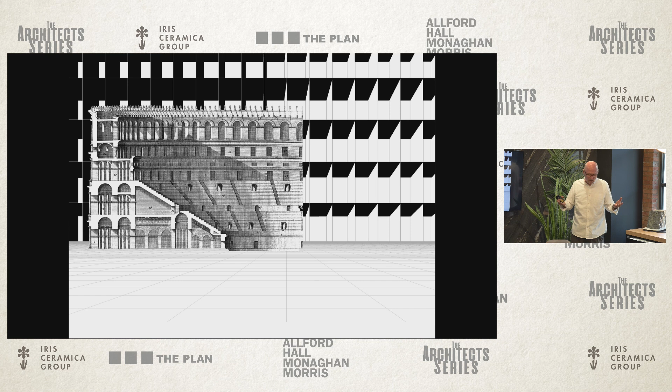This is a drawing we produced that's become a reference idea underpinning our interest in the theatre of everyday life—this idea of longevity. A structural engineer friend said recently, 'it's our time, the frame is the big problem, it's the big carbon problem, so we're responsible for it as engineers.' I like to think as architects we're responsible for it too, because we're not interested in the frame or the services or the architecture alone—we're interested in the whole thing.

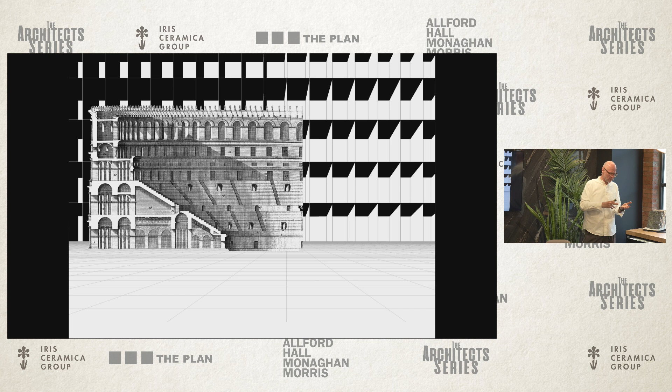But the frame is the first thing that goes up. It's the last thing to come down. If you get that wrong, you might as well forget architecture. So that's kind of the long-term project of the building: generosity.

In the 60s, when we squeezed buildings down, we created a legacy problem. The more generous historical buildings, the warehouses of the 19th century around here, work because they've got volume. It goes back to long life, loose fit, low energy. We talked then about that's the theatre, this is the stage set.

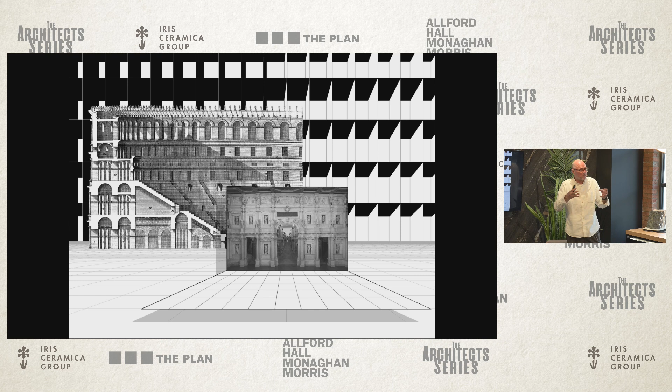Parts of the building will have a longevity of 5, 10, 15, 20 years. They are the more permanent architecture. When we worked on the Barbican for 20 years, we were building architectural objects within the bigger project of the Barbican. And then there's the props.

These are the furniture of everyday life. This is the clothes of the building. This is the things that allow people to make the building theirs, to take it on and do things.

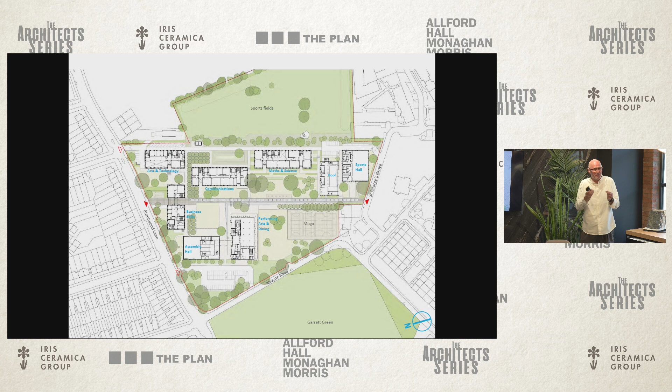And then there's that idea of working with a space at a very pragmatic, low-level brief, and then creating a series of buildings over time in an opportunistic way with an idea, but it shows architecture can happen in more than one way. The idea here was to recognize the constraint and turn it into the opportunity, this idea of slip form, layers of space, and obviously a nod to Breuer, but a pragmatic and clever way of making a system that was adaptable and could be rotated so you could create architectural variety.

But these are essentially just simple vessels, and the windows are moved as a play within that to distinguish the external form from the internal spaces. And then, of course, the bigger idea, which is the community of school children who use that space and come together.

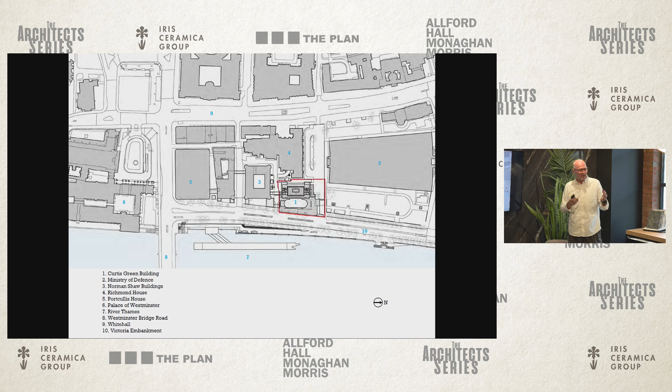This is Scotland Yard, a complex historical site. Paul talked about the curved glass vessel as a welcoming piece. He didn't mention the fact that there also has to be a bomb-proof welcoming piece. So again, in the most simple design, an extraordinary technological challenge of glass that's 2 inches, 50 millimeters thick.

And then this idea of, there's a lot of noise made now by some architectural magazines that are less notable than the plan about retrofit as the future. Retrofit has never been anything new; the architecture is the long history of retrofit.

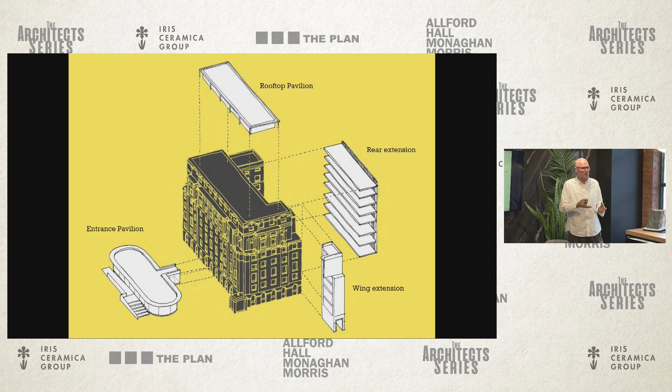Most buildings you will find are built on the footings of another building. Facades have been removed and reworked. Room linings have been removed and reworked. And this is what we were doing for the first 20 years of our life.

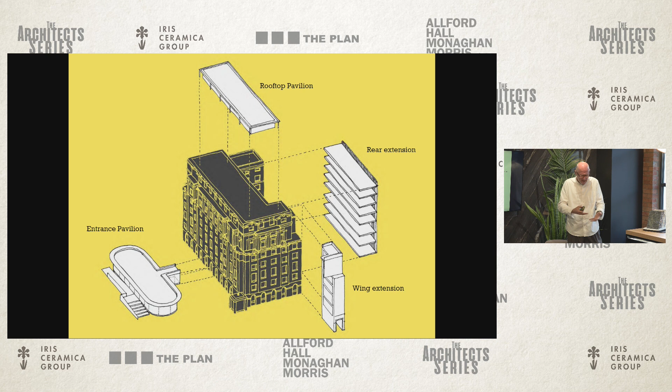We were desperately keen to do something new. And in the end, we realized it's all architecture. Finding something and then working with it is no different than finding a piece of city. We don't clear the whole city so we can do our own thing.

And then this, I think, is a rather beautiful drawing I found in the archives of the idea of the reworked, restructured building, and this early idea of the theatre of life behind, and the symbolic importance of architecture, its relationship to government, its relationship formally to historical buildings within its own site and beyond, and how a particular motif used by Norman Shaw can then be played out from a layering of stone and brick into a layer of stones on the ground plane, a kind of reference across time and across planes.

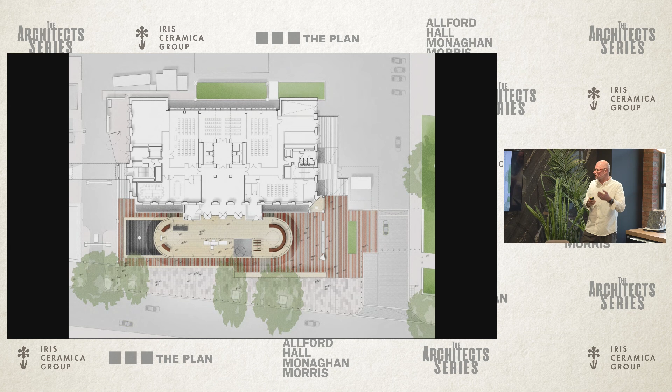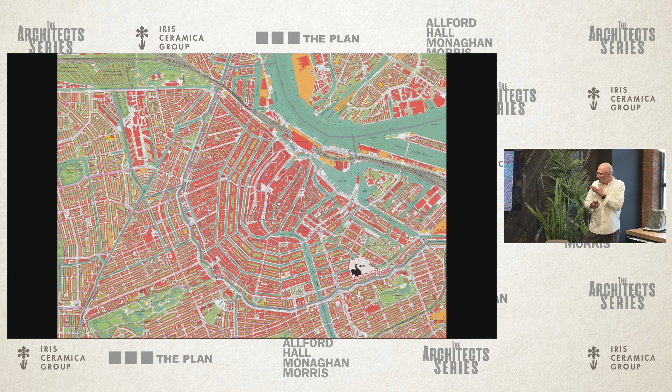And then this idea of talking about the churches and the plan of Rome, the Nolli plan, but actually the eternal frame and the idea that this building has a meaning to people. Amsterdam, a foreign city, being part of a historical fabric, being part of Gawronski's vision for the building, engaging with him in a discussion - our early diagrams being rather cruder than the piece, but that's the nature of architecture at the early stage, and I think that's okay.

The idea of their brief - it's 1 million square foot, but their brief was pretty simple, and we won the competition by saying to them: look, we know that whatever you tell us the brief is, it's not going to be that in the end.

We're making a journey through a building, but we're going to organise that journey - the streets and a series of public rooms within the building - and the rest of it, we'll just pour the uses in as your needs change over time.

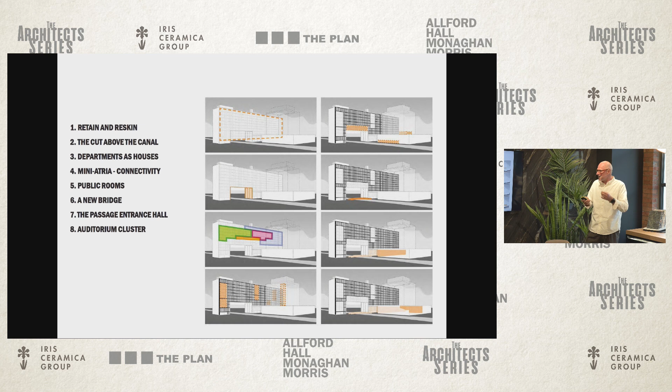And we invited 6 other European practices to work on little elements within the project. And then this idea of different scales of social engagement in specific venues within the building, but the biggest social engagement of the whole thing is what they call the study landscapes, which is the promenade from the Bradbury building.

And then the bigger promenade - this is the interim use. So for 5 years you entered the building from an island that we built over the canal because we hadn't done phase 2. We created these journeys within the building, with this idea of vistas, colours and form.

And then these are the props within it, some by us, some by others. I don't like particular items within this, but does that matter? They're items of furniture that will come and go. It's nice to control them, but 20 years on, it'll change again.

But the bigger picture is the building and the city and its legibility, with the public rooms identified as a piano nobile - so you're aware that they exist and that you could access them. That idea of architecture as a journey across time, not one architect, not one practice, not one individual. And then this idea of making and remaking, retaining - it seems to be an ongoing theme.

And then this idea of an intermediate space that's used as an entrance in the first condition - the 60s idea that Craig mentioned in the film, where there is no entrance because everyone's going to arrive by car. And then us making an entrance in the void, and that entrance becoming the public room that connects the students who travel through it into the lecture halls that are like boats they walk on and then drop into.

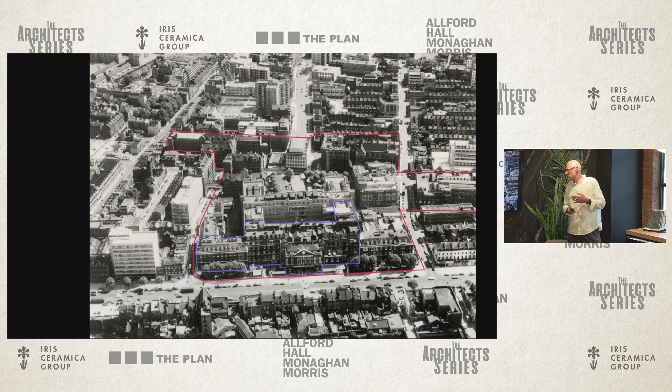He actually had a very serious illness and health scare here, and he was very interested in seeing the project on the basis that it actually both shaped his life and saved his life.

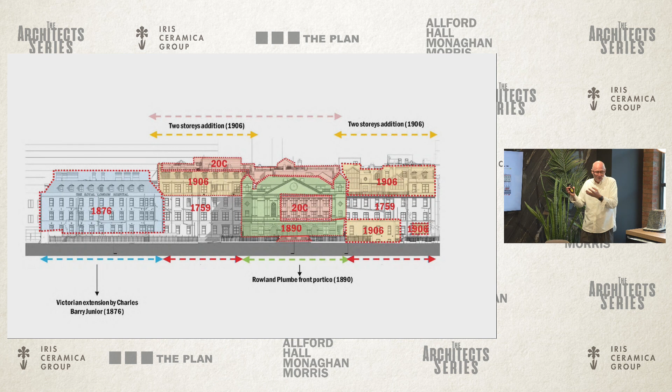And then this idea, of course, of the project of making, the project of researching - you're not going to find it in the history, but the history can inspire you to think differently. And actually, the sort of idea of incremental interventions becoming important historically.

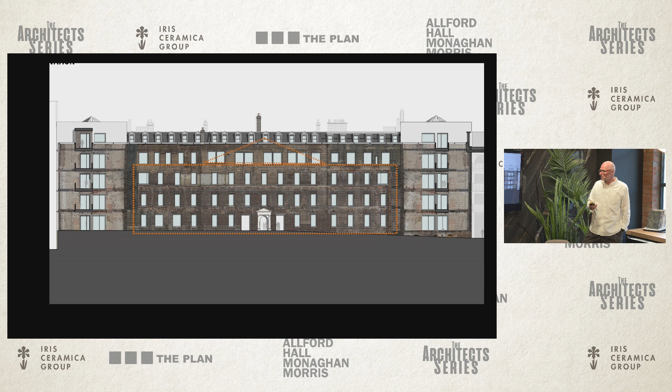Again, this idea of the layering of history and the found space. And what's important about this building is generosity. The lesson to learn from this building is generosity, reflected in the idea of the public realm, the idea of reuse, analysis, not over-cleaning, not over-restoring, enjoying the detail work the team has gone into, thinking about new materials and old materials and palettes and colours—relevant to some of the conversations we had here in the showroom earlier.

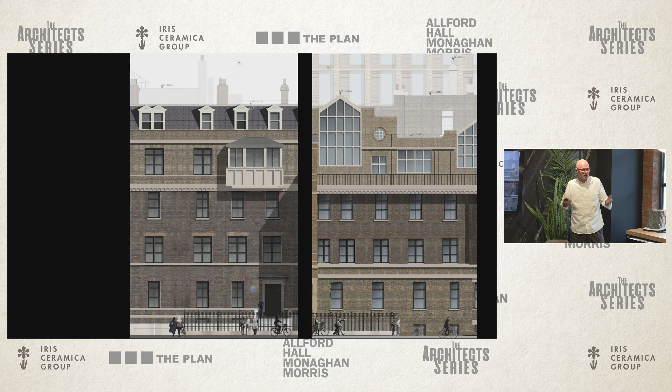And then this idea of wanting to make an elevation. It happens, as Paul said, to be around the back. This is what the public are aware of. These are the elevations around the back as they emerge, that have a relationship with the front but are distinct.

And then, of course, Paul talks about the simplicity of technology, the BIM model, to kind of isolate problems. It doesn't always quite do that, but it highlights the three-dimensional complexity of architecture and space, and the problems of overly smart buildings.

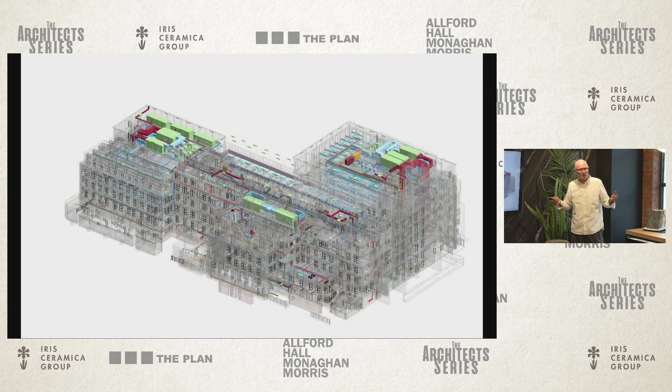So I always talk about caves rather than oil rigs. If the building's simple, has good thermal capacity, mass and volume, you don't need to over-service it. Like most cars that can do 0 to 60 in 4 seconds, with computers that could have driven a global bank 30 years ago—buildings are over-designed.

And then the idea that old and new coming together is actually a gift. It's not a problem—it's a gift that allows a richness and a palette of materials, so you can neutralize one to draw out the qualities of another.

And retention, it's kind of common sense. The other big carbon story after 100 years of developing air conditioning is we kind of go, well, it's brilliant now, you could open a window. We're the only people who, for about a century, forgot the idea of natural ventilation.

And then this attention to detail exists all the way through the process of architecture. So although I talk about constructing ideas, craft, the art—think of the FF&E—I talked about materials and stage sets and props, but actually it's attention to detail.

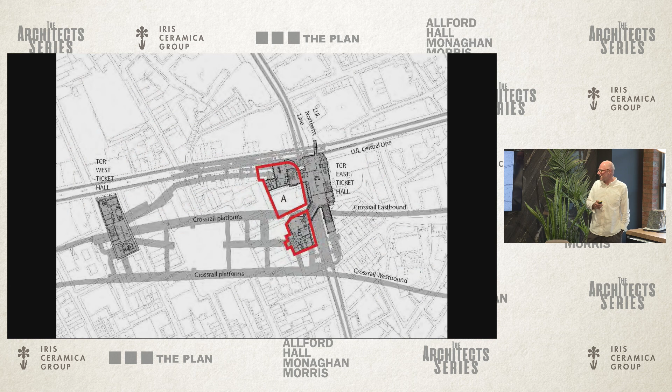London had a whole series of sites cleared by Crossrail, right next to one of the finest London squares that you enter on the centre lines rather than the corners. This idea of theatre took 5 or 6 years to establish.

And then this idea of the reference of history, the idea of theatre and office as related buildings. They're both containers for life.

An early study of it—the politics of planning, the idea that architecture is a long game. There are moments where you know what you're doing. We designed a tower at one stage for this site. We knew it wouldn't happen, but it was part of a process.

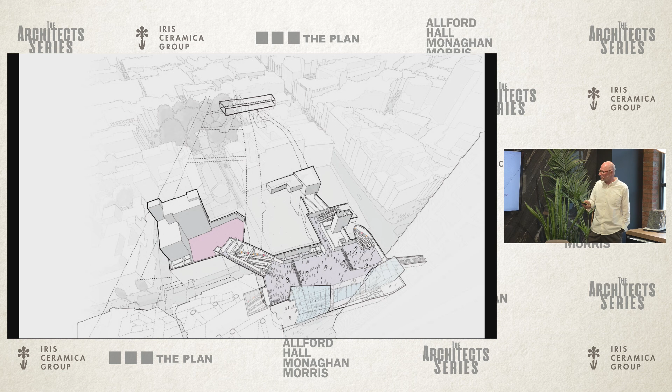And then this kind of unique moment of an extraordinary series of problems, including that's the site as we received it. There's the photo. And this is the kind of wonderful absurdity of London: next to that concrete structure on the left by the church, that is 3 jet engines worth of noise and air extract coming out from Crossrail, next to which we're putting an auditorium with a 20 decibel rating.

So it's kind of, if you're making something, if you're making a theatre, you would not make it on this site. But because of politics and history and life, that's exactly what we did.

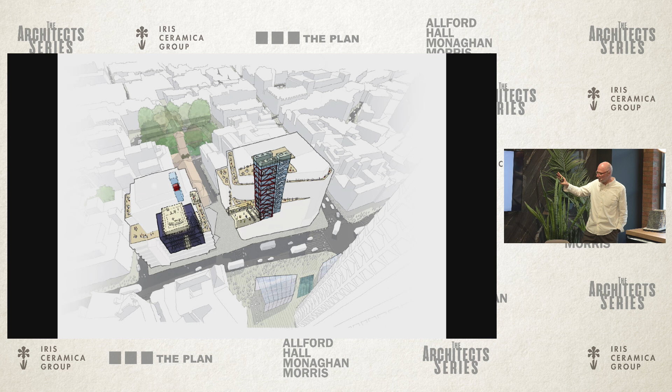And then this is the idea of a cantilever bridge that is stiffening the office building on the right, the box of the theatre within—the complexity of building on these icebergs.

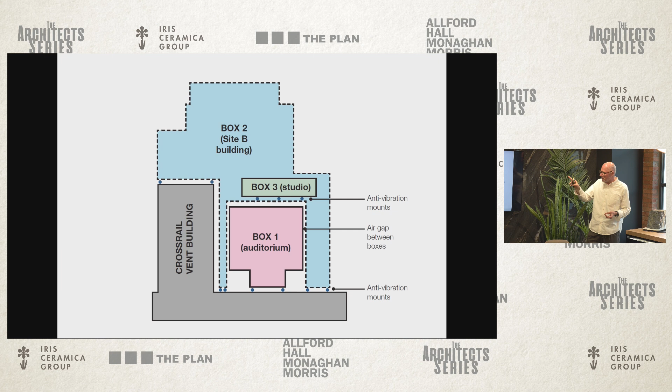But that's the kind of joyful challenge. There's this extraordinary idea that we build an auditorium on dampers, we build a building above the auditorium, and then we build a rehearsal building as a floating building within the building, all because of this Crossrail opportunity. But if Crossrail hadn't come, we wouldn't have the theatre.

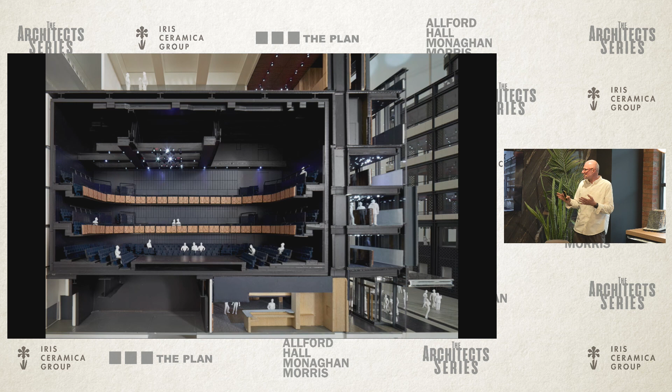This is the twelve layers of construction that allow us to do that. And then this is the idea of that perfect room where you can hear a pin drop next to what's the equivalent of a 747 jet on landing, and you're ten meters away.

And then there's a kind of wonderful problem of designing a frame to sit on mass dampers on a building that we hadn't designed, and just making contingent decisions and saying we'll deal with that down the line. And then these are the models, the processes by which we explore architecture that become mock-ups.

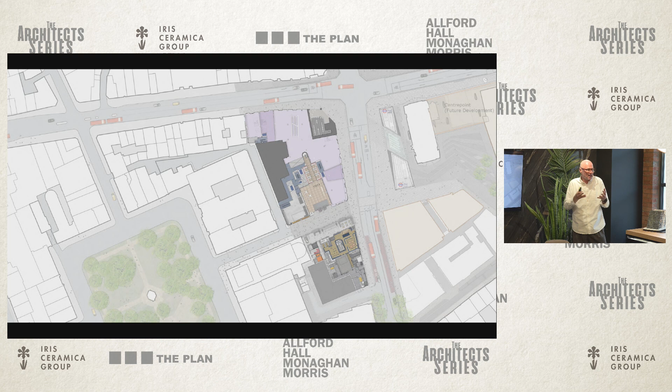And then, of course, the building in the end, when you look at it, it's kind of squeezed between infrastructure. But then architecture is a kind of delightful version of infrastructure within the city. And not all buildings can be frontally viewed - if you get a bit of clever camera work, you can.

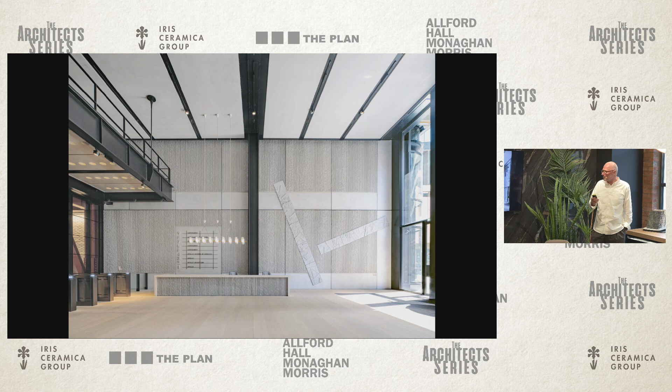But these buildings are actually kind of ante-rooms to each other, to the public space. The office space is a receptacle to be used. It is the stage set for the life of the office. Old and new coming together, the glimpsing of different architectures at different views, the lavishness of the theatre interior.

I talked about beauty. The challenge from Nica Burns, the client for the theatre, was, why can't I have glamour? And then the auditorium itself, kind of a place of escape. It is a public room within the city.

And again, that idea of office, church, public space, Centre Point - much reviled, now listed. Again, that idea of architecture - a long game, beware of fashion.

And I switched from those to the other because this building can't really be perceived like that, but you can if you've got a clever camera. And this building can be perceived like that. And this is Berkeley Square.

And I talked in the film about the uniqueness of the site, the specialness of the opportunity, the fact that it's a kind of architectural zoo.

There's a little bit of the 19th century square. The conservation lobby will only see that, but there's some rather splendidly bad 1930s mega offices, and quite a good building from the 30s, flats and a car showroom, and a less good building from the 90s.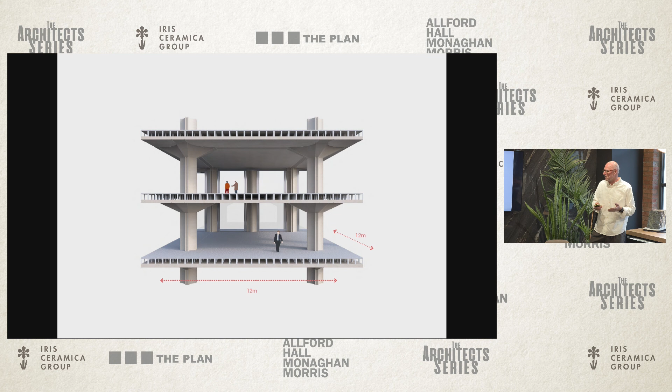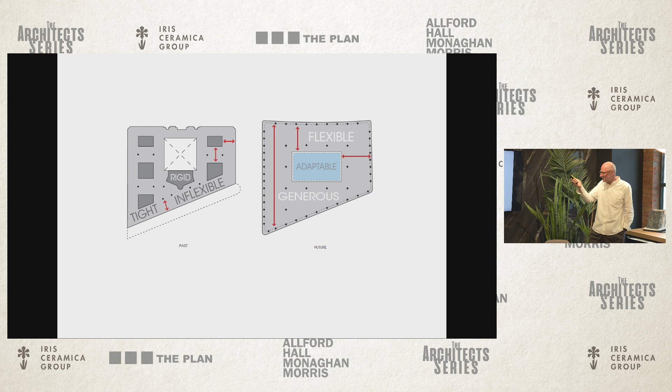So the left is what we're taking down, the right is what we're building. The history of the site has informed this project, but the history of the building on the left and our long history of playing with buildings has informed this project, where we know that the building should stand up on its own and we can play with the middle. That's the soft center that we can adapt so the building can stand up.

And the reason we liked that idea wasn't just future and change. Going back to the idea of beauty in the facade, it's a real struggle to make facades, particularly when you can draw whatever you want and it gets made in a factory in Belgium, Spain, and gets brought over and gets clipped on - it's a kind of environmental veil. So the long history of modernism and freedom has actually proved to be quite difficult for us to deal with, because actually we can do whatever we like.

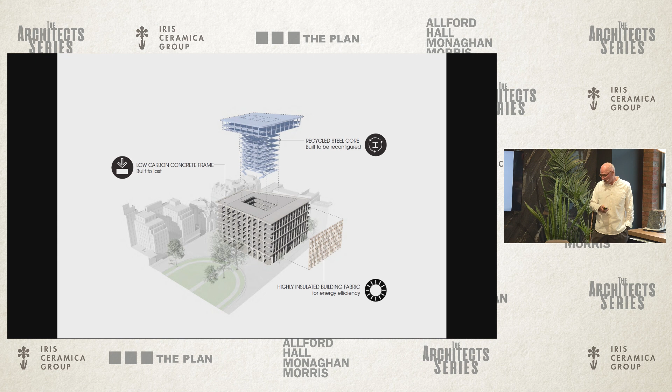When you can do whatever you like, it's quite tricky. So the other side benefit of the sway frame—let's look at the interiors, the organization—but the side benefit of the sway frame wasn't just adaptability as a theme, it was the idea that the frame became architecture.

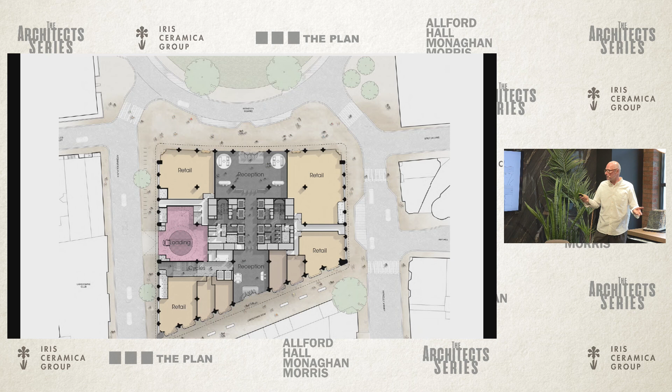We're back to putting windows into walls, except these walls are quite heroic, load-bearing, stiff frames that don't need the bracing of a core in the middle. The core will be built, but it will be adapted. Then how you play with it, how you sculpt it, how you utilize new technologies—precast, high GGBS, low cement, prefabricated components that you can sculpt—and more traditional stone components at the bottom.

Nicola talked, when we presented this at WAF, about brutalism, which I take as a real compliment. Maybe a very refined and expensive palazzo in London, but it has a certain kind of brutalist clarity.

I show this because often at the very beginning of a project, and life is full of dilemmas, we don't know what it's going to look like. But it looks, and we will say, well, it'll come. In this one, we knew what it was going to look like on day one because the idea was powerful enough to carry through. So that was the competition-winning image of the project.

That's the image of the project as it was a few months ago. That's the image of the project now as we've further engineered it. But there's a clear relationship across time between the projects.

So I made the beginning slow, the middle relatively quick, because you've seen it. But in a sense, you can give a talk and it becomes a catalogue of projects done. I'm just going to talk at the end a little bit about things we are looking at now.

I use that image, one, to be a break in the lecture, but two, Stewart Brand produced the Last Whole Earth Catalogue. He also produced the book, How Buildings Learn. And he talked again about Building 20 at MIT, which is the only building that wasn't designed by an architect, but it's produced more Nobel Prize winning scientists than any other building, despite all the money they've invested in those buildings—because the occupants... it was a US Navy, Army, Air Force building. It's a simple timber frame, and they could cut and play with it and use it over time.

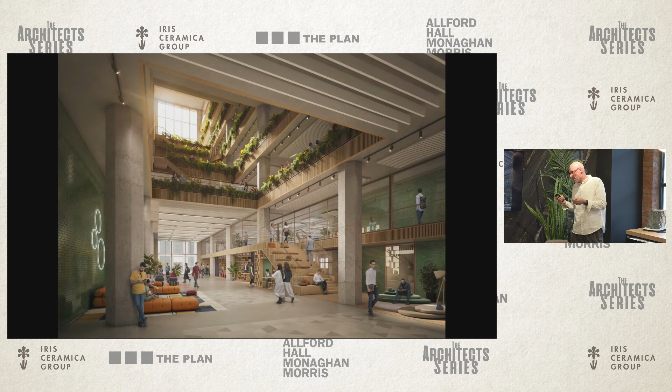And this is the edge in the city, around the back of Finsbury Square. It's an idea about a warehouse. So it's a warehouse, its imagery, its construction. It has a simple warehouse logic, not dissimilar to what we're in here. Internally, it's a concrete frame, but it has a timber infill system. It's trying to push the boundaries of how you'd lower the carbon story.

But there are challenges beyond design and technology, such as insurance. But this is the kind of journey one's on. The building has to work regardless.

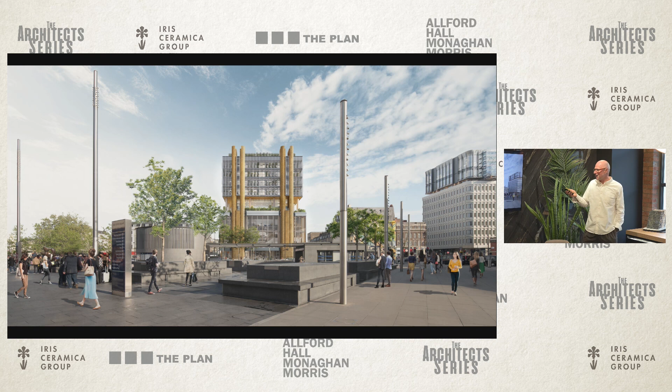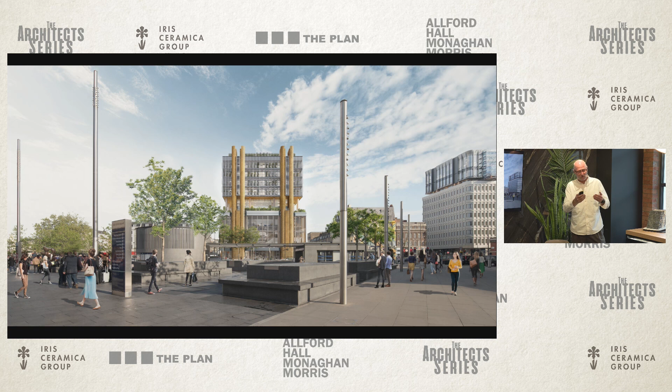This is Belgrove House, opposite King's Cross and St Pancras Station. It's 4 floors of labs, 4 floors of offices, and 2 floors of collaboration spaces. One structure for the labs, one structure for the offices, and an idea about making a symbol, a monument to 21st century science and production that acknowledges across time a relationship with the 2 great stations opposite. Quite a challenge—we shall see as we're building it now how that challenge turns out. But this is that idea about this building representing the 4th industrial revolution into the future.

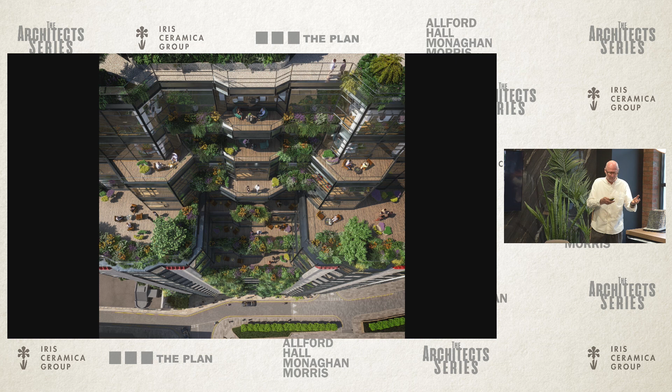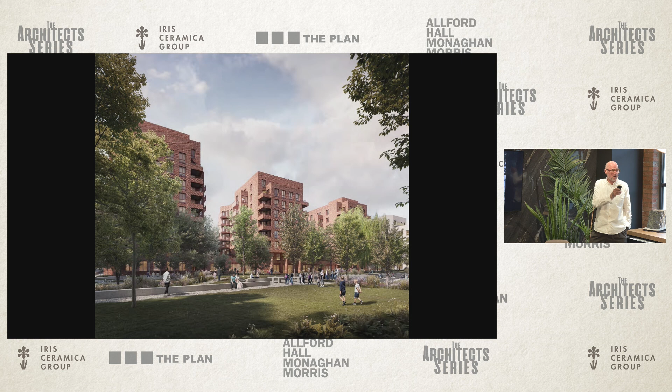And this—we don't always keep buildings. This is Holloway Women's Prison, which has now become 1,000 homes designed around a park. And what we retain, again, it represents, going back to that Nolli plan, the one thing we keep in that building—because it's quite a fine Victorian castle, rebuilt as an industrialized prison in the 70s—the one thing we retain in that building is the gardens of the women who lived and worked and were incarcerated, problematic, of course, within that prison.

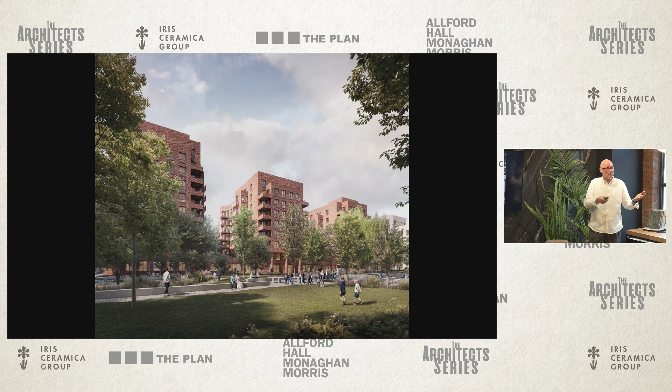But that's the mature legacy and the memory of their engagement. So the entire project is defined by the landscape that is left once the buildings are removed, and that we then reframe, resituate, and reorganize.

And then just coming to the end, in our little journey in America, it's been about learning, right in the middle of America, in Oklahoma, but expanding out to the west, to the East Coast, about actually the kind of return to that Miesian thing about industrial construction.

They build industrial construction pretty well in America. Not always sure about the architecture. All those great towers, there's no idea about the promenade. It's just, let's skin it. Who does the prettiest skin?

But we're kind of revisiting again. By going there, we're learning a lot, ideas that were exported from London, but also importing. The idea about shipping containers making pop-up cities. The idea about bringing back streetscape to a town where we don't have any cars in London. In Oklahoma, it's one car per room, and they normally got six wheels. So it's about kind of exporting some European sensibilities.

Obviously, there's a certain Americana fantasy that one enjoys with these big trains that run for 24 hours across the country. But then taking that research project of pop-up containers and then finding a maverick individual who's not a professional client, that can also be very good, the naive client, the naive architect.

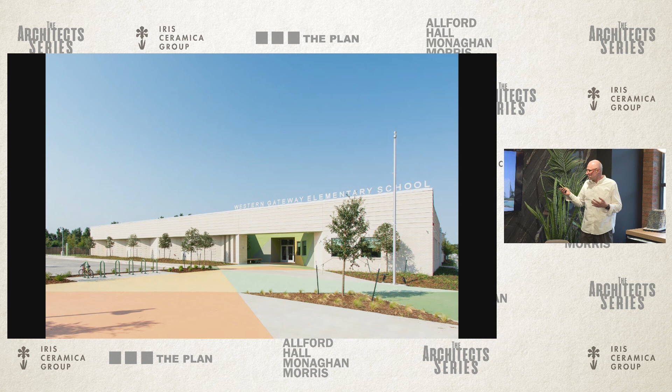Social Capital is a club and a bar built around a reused petrol station. The Western Gateway Elementary School I like because we have to build a tornado centre because the city gets ripped apart every so often. Healthy living in Dallas. I mean, there isn't much healthy living in Dallas, but that's the ambition of the project.

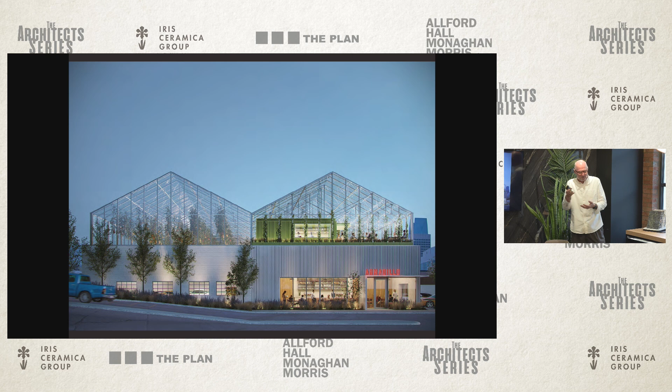And then this building, which we have a joke, is the kind of marijuana factory. It's not actually; it's a restaurant, with a kind of urban allotment on top. But you find, by kind of going back to our history of meeting these maverick characters, that a less professional version of architecture is interesting.

Here we're recycling an industrial storage building into the new Texas Ballet. So we're cutting and playing and making some theatre out of a found building.

And then here at the memorial in Oklahoma, a very important site. In fact, the American AIA gold medalist was the architect for this site, placing a new London idea of an office. So it's kind of got potential for low energy. It's got better volumes, a much more urban skin. It mixes up a club with work, with facilities on the roof.

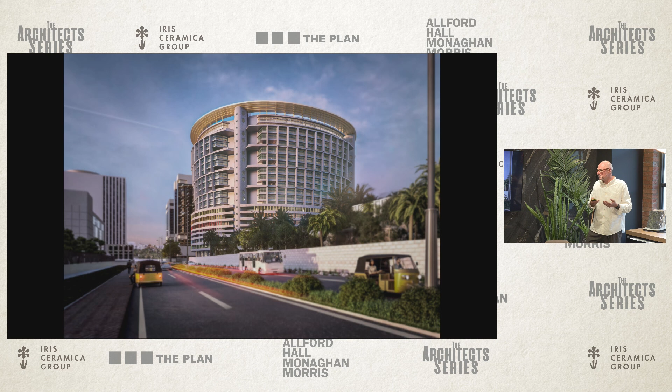It's the same challenge in another place, as is this building with Google in India. This is a building for 25,000 people. It's an idea of a single object building that addresses the fact that every other building in Hyderabad has a glass skin with a shading device.

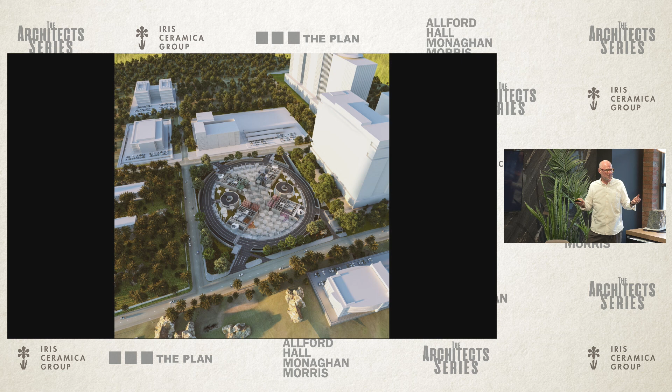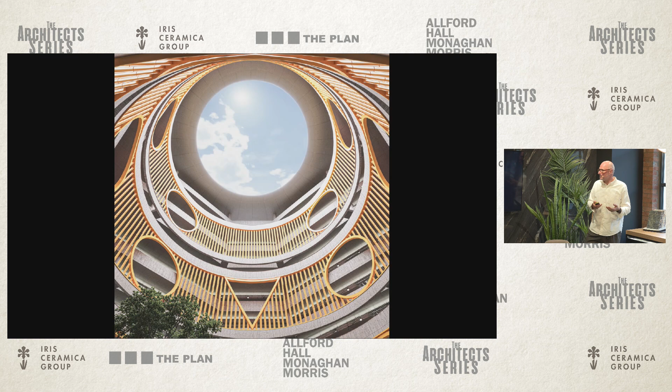Our idea was simply, we know that they have wonderful craftspeople. They can make amazing concrete, and they use concrete almost exclusively, but actually it is the generic material of the country. If you can make a frame, make the facade disappear, you've got a lift package, you've got natural ventilation through the courtyards. It's an indoor-outdoor building. It's a piece of city gathered together to allow people over time to invent a different way of living and working. So it's kind of saying, actually, what you were doing in India up till the invention of modern architecture and its import was far more sophisticated.

Architecture isn't, in our practice, but I think in any form of architectural practice, it's a journey. The uncertainty of the journey is good. Not knowing what you're doing is good. And as Cedric Price said, it's not about designing bridges, it's about how do you get to the other side? How do you take the next step? That's it. Thank you very much.